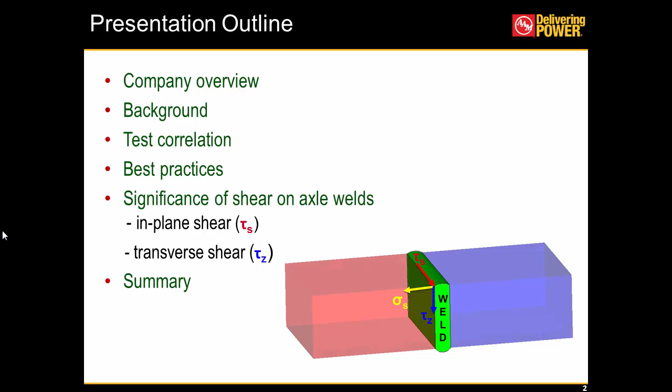In today's agenda, I will start with the overview of American Axle, followed by a background of the Verity structural stress method. This will be followed by the correlation which we observe with multiple automotive axle components. And I have two cases which I feel are interesting for all the CAE users here, which I call best practices related to the weld sizing and also the load if it is compressive in nature. And finally, this will lead to the crux of my presentation, which is to detail the significance of shear components on the axle. And I will wrap up the presentation with the summary.

So American Axle is a Tier 1 supplier of driveline and drivetrain components. It was established in 1994, and it's headquartered in Detroit. We have more than 100 customers serving the world's leading brands. There are more than 35 facilities located in 13 countries, and we have more than 10,000 people working for us around the globe.

So the Verity module in FESafe is able to calculate the structural stress which was developed by Battelle. Compared to the extrapolated stress-related approaches, it uses nodal forces and moments to calculate a traction stress component. Because of this, it's generally mesh insensitive as long as we are able to represent the geometry well. And it has been validated for different geometries, different programs, and different sizes. So this mesh insensitivity is especially useful for us because we have full axle components which can have millions of elements and 50 to 100 welds. And the usual process can be really time consuming.

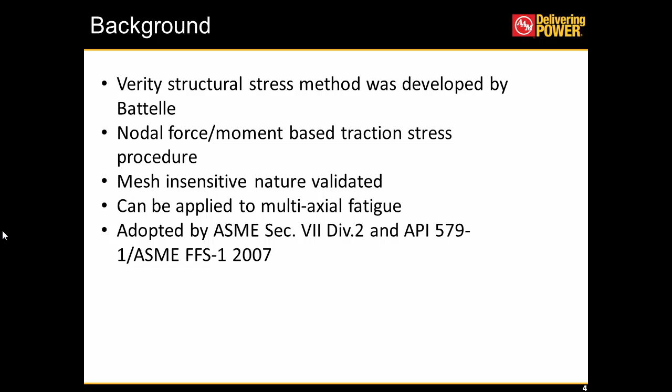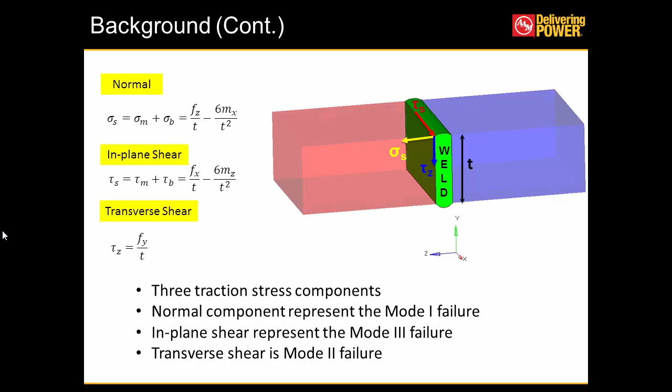So here I have an example of a butt welded arrangement. We have a hypothetical crack plane which is represented by the XY plane, and the very complex stress distribution because of the notch effects can be simplified to a very simple stress state, which can be represented by a membrane and bending component. So there are three kinds of traction stress components. There is a normal structural stress component, there is in-plane and transverse shear. The normal component represents the mode 1 failure, the in-plane shear represents the mode 3 failure, and the transverse represents the mode 2 failure.

So Battelle did thousands of test data, and most of the cases were related to mode 1 failure, in which only one component was required. That was the normal structural stress component. And when they used the thickness and loading effects, they were able to reduce the scatter in the data significantly. This I(r) function, or the load mode function, has a fracture mechanics background, generating a bending ratio, which is calculated from a two-stage crack model.

But that does not mean that it can be applied to all the cases. Let's say there is a case of torsionally dominated loading, or maybe even pure torsion. In those cases, we might need to include the shear components. So from the distortion energy hypothesis, we have the von Mises form of the structural stress, which is shown as the effective structural stress range equation, in which we include the in-plane and the transverse shear components. And by including the thickness and the loading effects, we'll be able to calculate the effective equivalent structural stress range equation. So on the left chart below, most of the cases are pure torsion and torsionally dominated cases, where we were able to obtain a very thin band of data.

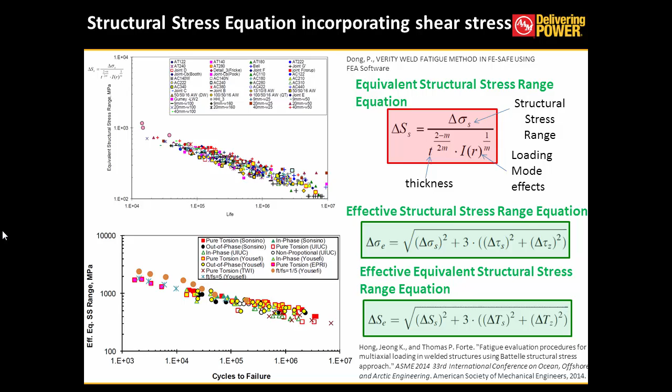Some other unique advantages of this process: we don't have to worry about the separate representation of the base material or heat affected zone and the weld material. Also, the yield strength is not a factor. Multiple tests were done on different grades of steel, up to even 1000 megapascal, and it was found that one curve is able to represent the entire case. And also, the tensile strength has very minimal effect. So for all those cases, we will be able to use one curve, and this curve is the master SN curve.

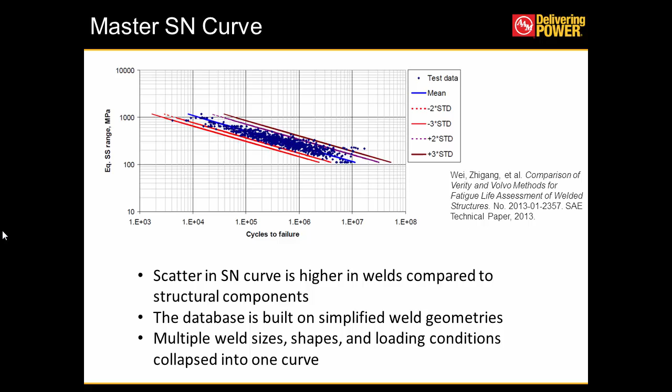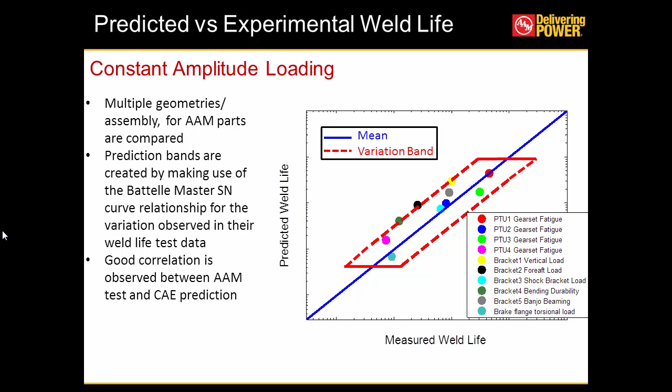Then there is the shock bracket load, which is the load through the shock bracket, which comes through the shock absorber. Then there are many different loads, even the torsion load which is applied on a brake flange. So multiple cases, multiple programs, all able to correlate within a simple variation band. So we see good correlation with the constant amplitude loading scenario.

Now we look into a variable amplitude loading scenario. Earlier we were talking about this bracket weld. Here on the top right picture, we have a rear axle, and the bracket weld we are talking about is a shock bracket weld, which is the failure mode we are able to predict using this Verity technique. And this green component is the carrier which holds the differential, which allows the wheels to rotate at different speeds.

For this variable amplitude loading case, we have something called time history. During the entire vehicle's life, there are multiple load paths: let's say the weight of the vehicle is on this particular bracket, and there is load coming from the shock absorber. All these load paths are acting at the same time, and as you can see from this pink dot, we are able to predict within the variation band.

The second case study is a PTU, power transfer unit component. The power transfer unit takes the power from the transmission and transfers it to the rear drive. This is one of the systems inside the power transfer unit, where the load comes through the helical shaft, and it's welded to a hypoid gear shaft. We are talking about the life of this weld, which is circumferential in nature, and in the case of the rear axle weld, it is a fillet weld. In both these cases, we get good correlation within the band.

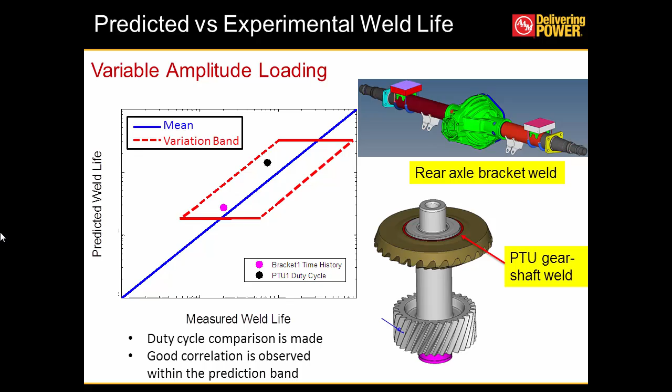That brings me to some best practices which can be very useful for CAE engineers. We already have certain practices you might see in the manual, such as wrapping around the weld, since weld end failure is one of the most common failure modes. By doing a wraparound, we'll be able to capture that effect. In this case, I am going to talk about the effect of weld sizing and also how the mean stress might affect it. Maybe Dr. Hong will have additional comments and suggestions, so I will leave those additional topics for him.

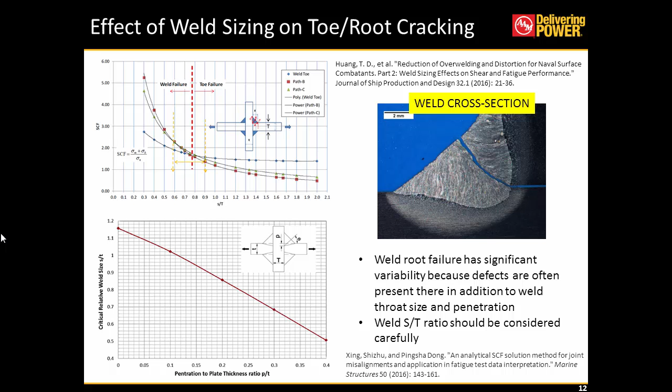So my second case is an interesting one, which I think our keynote speaker already discussed a little: the effect of compression. This had been a confusing thing for quite some time. So in this particular case, we have a butt welded scenario where we are applying a compressive load. This will generate a compressive stress on the weld, or structural stress I should say, which, when we look into the post processor, will give you a

weld life. Let's talk about an alternate scenario where we are applying a tensile load, which is able to generate, let's say, the same magnitude of structural stress. What we will see is that the same magnitude of tensile structural stress will give the same life as the compressive stress. Some of you might be confused, but some of you know that is because it takes the effect of the range, not whether the stress is compressive or tensile in nature.

And there are multiple tests which have shown that welds can fail under compression, but the question still remains whether the same magnitude of compression or tension can cause the same life, because very often in our industry what we observe is that's not the case. When we predict it, we are severely under predicting the results.

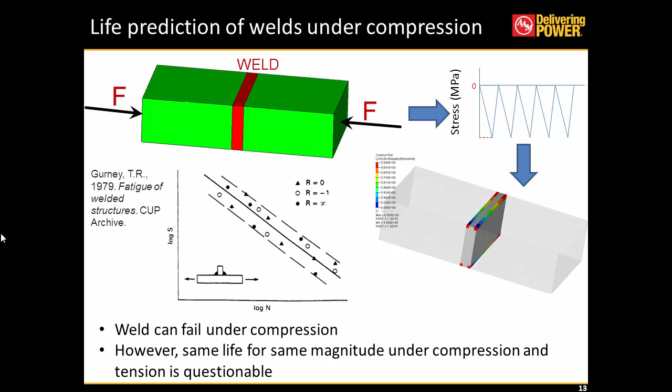So there is one suggestion, one way which we might be able to look into, that is to consider the effect of mean stress. Mean stress can arise due to, let's say, preload, or even due to load, or even the presence of residual stress can be considered as a mean stress effect. So in this particular case, some tests were conducted and it was observed that different kinds of

So as you can see from the chart below, if you don't consider the effect of mean stress, then there is significant scatter. And if we include the mean stress term, as you can see in the equation on the right-hand side, we'll be able to reduce the scatter significantly.

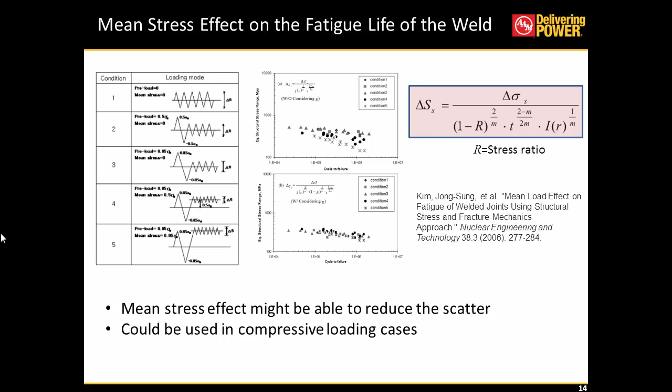But this does not mean that this can be applied in all cases, but some cases where you see that it's severely under-predicting the result, then this might be a case to look into.

Let me talk about the effect of shear components. So first, I have a situation where the mode 1 is dominant. In this case, we are able to predict the location of which weld is going to fail. What we observe is that in this particular case, a rear axle where the shock bracket weld is failing, it's dominated by normal structural stress. The shear effect is minimum, and we are able to predict it pretty well with the test.

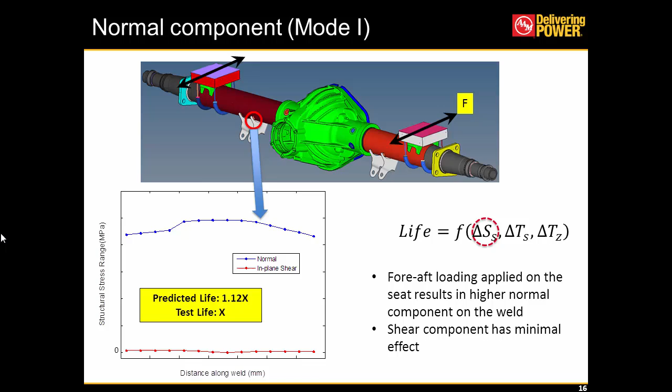Now let's look into a second case, a brake flange weld, where it is subjected to a torsional loading. This is the case where we were talking about throat failure. In this particular case, we observe that there is a very high in-plane shear component. And there is also a normal component because of the gaps present between those two components and also the non-symmetry of the brake flange.

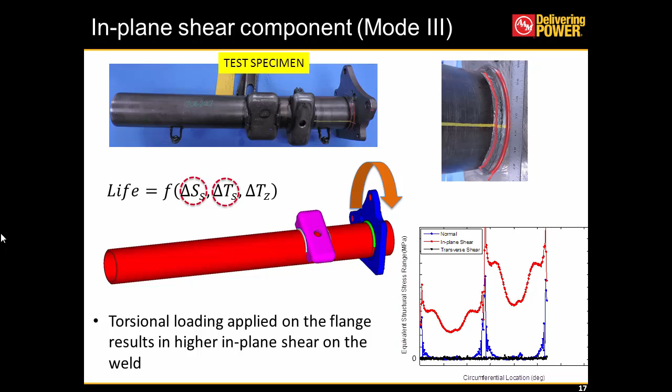So when we compare the life prediction, if we don't consider the effect of shear, we are severely over-predicting the life. The plot is like this because it's like a 270-degree weld. But if we consider the effect of shear, then we are able to get it within the variation band. So what it shows is that we need to consider the effect of shear.

Also, I forgot to mention this, we need to consider that this is a throat failure, not the usual way of predicting through the thickness. This was done through the throat of the weld, not through the thickness of the weld. If we look through the thickness, it will not give you very reliable results or close to the test results. So depending on the failure mode, we should model the weld.

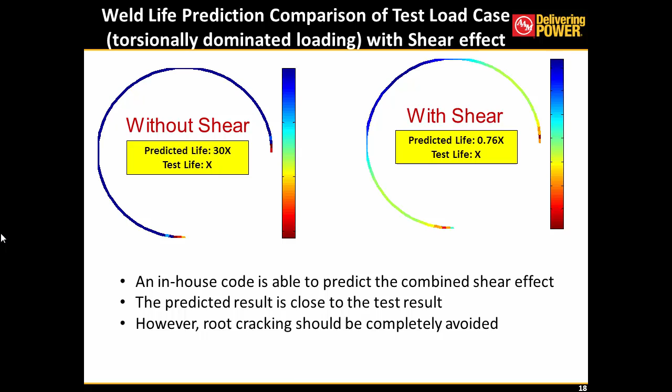Our third case is a transverse, mode 2 load dominant scenario where we have a component which is fixed at the bottom, welded to the gear, and pulled axially. We observe that there is a very high transverse shear effect. The preliminary results had shown that if you don't consider the effect of transverse shear, this will be over-predicting the life.

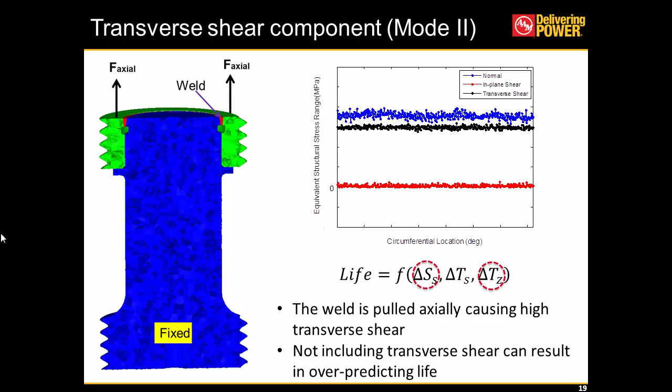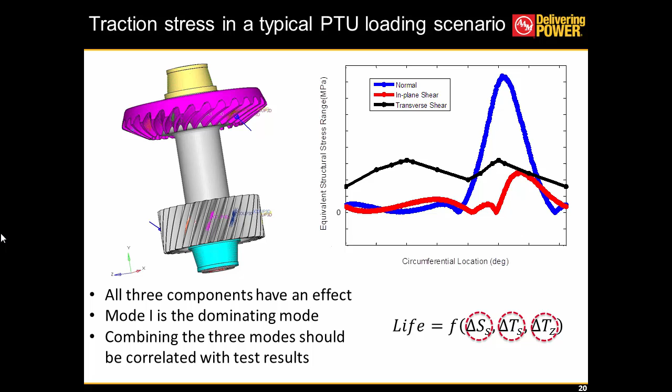My final slide is discussing the combination of all this, which is a very common scenario in our PTU. As you can see from the slide, in this case the normal mode is the most dominant mode, but the shear terms are also contributing to the life. If we don't account for the shear components, then our prediction will be away from the variation band.

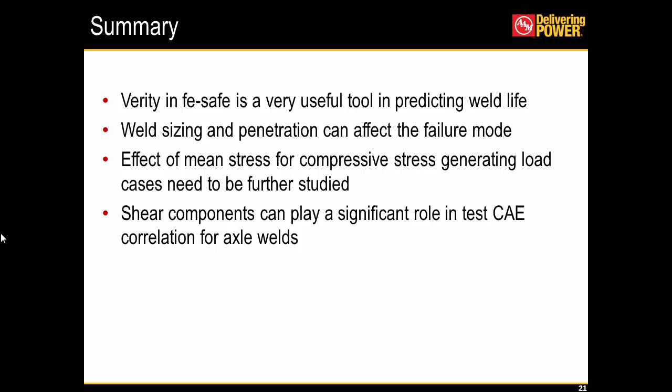So in summary, we learned that Verity can be a very good tool in predicting the life. We talked about the effect of weld sizing and penetration. We also talked about the effect of mean stress and a way we can handle it. And finally, we talked about the effect of shear components and how it is important to predict the life accurately. That's all from me, and thank you.

Thank you. I have a question, actually. I might have misunderstood part of your presentation, but it sounded like you stated that if you have shear-dominated welds, the expected failure mode will be a throat failure rather than a toe failure. Is that correct? No, that is not correct. Right, okay. So my misunderstanding then.

In that particular case, it was a shear-dominant loading, and the throat failure occurred not because of the loading, it is because of the weld sizing. Oh, I see. The weld size was very small, and the penetration was also very small, and because of the loading, if you don't look along the throat, we will not be able to capture the mode.

So you think the initial statements comparing weld size and penetration would also hold for shear-dominated welds? All these factors are critical, because at the end you apply the load. Instead of defining the weld lines across the thickness, we need to know that we are looking only through the weld, not through the thickness.

So if we are able to look through the throat, then we will be able to capture the effect. But if we look through the toe or through the thickness, then we will not be able to capture this mode. Okay. It is more about understanding the failure mode, and then we'll be able to capture this effect. Okay, thank you. Yes. We have a question there.